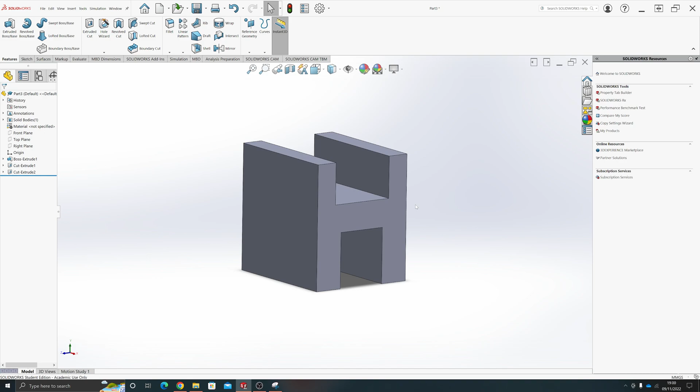Okay, so in the previous video you should have got to this stage with your shape. If you haven't, go back to the previous video and get to the stage where you've got these two cutouts. Now we're going to rotate our object and draw on this surface here. Click on this one and do sketch, spacebar, Normal To.

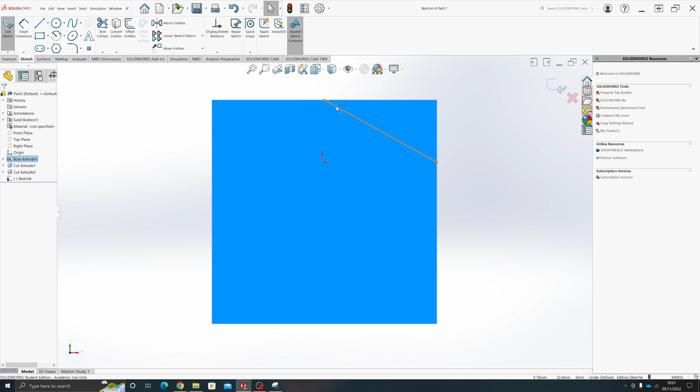What we're going to do is cut out this corner basically, so we're going to cut this corner off. I'm going to use my line tool and just click on this line. Don't worry too much about where they point to at the moment, as long as they move along and you haven't locked it to the middle line. If you lock it to the middle line, we won't be able to use this. So just click near the edge of the corners, like so.

What we're then going to do is smart dimension this point here, so this point to this corner here, and we're going to say that we want that to be 30 millimeters away. And from this point to this point here we want it to be 40 millimeters away.

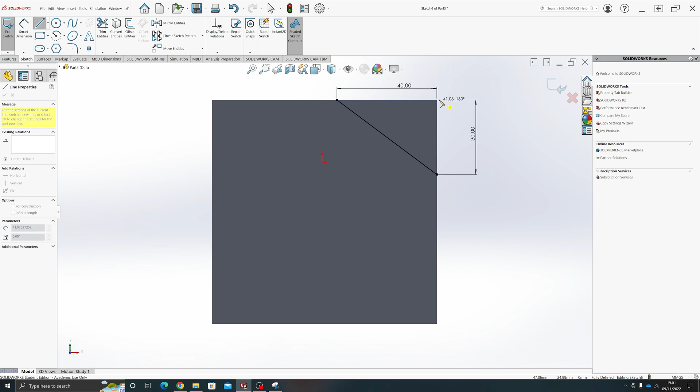Because we want to cut out this section here, we can actually fill in this section. So we're going to draw a line across here and here, basically drawing the profile of what we're going to cut out. I'm going to go to my features, extrude cut, and cut all the way through. So then I end up with this cut away here.

What I'm going to do after this now is I'm going to add a fillet. A fillet is when you round the edges. You get two different tools up here, a fillet and a chamfer, and just bearing in mind this is in the features tab, so if you're in the sketch tab, it won't appear. So do features and then you've got fillet, and then you've got the drop down chamfer. So fillet for us is going to be rounded.

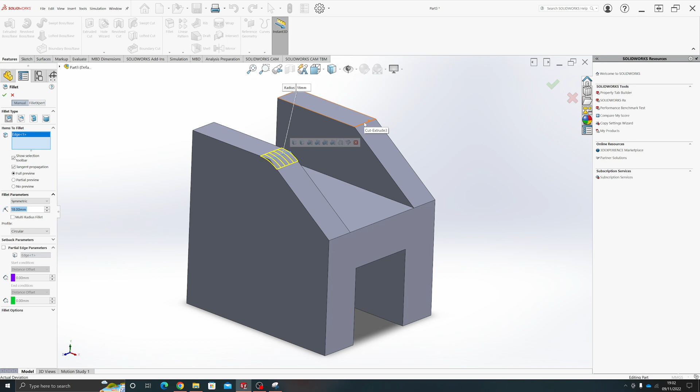We're going to set this to 18 millimeters. Then I'm going to select the two lines that I want it to round, so these two lines here. I'm going to do both of them at the same time - you can do them separately, but that just means if you wanted to change any measurements, you've got to change both individually, so it's easier to do them in one go. Push the green tick, and then we've got our fillet on there, so it's been rounded slightly.

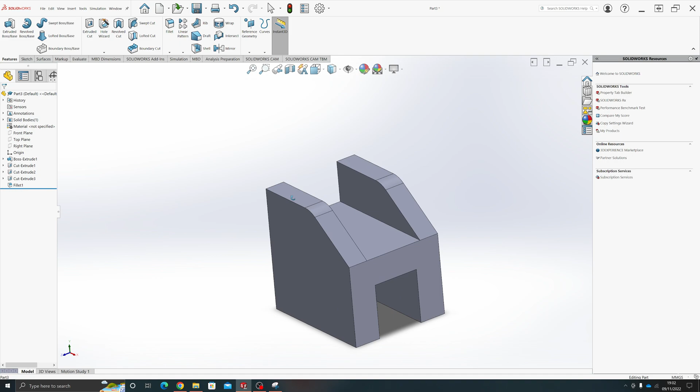What we're now going to do is start adding some of the holes for this object. So we're going to sketch on this face here. Click and sketch, spacebar and Normal To.

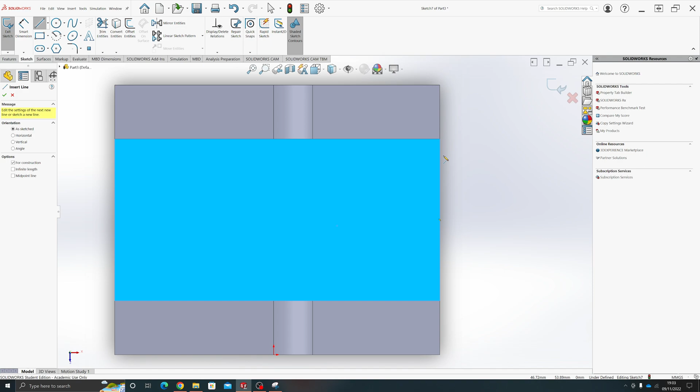And what we're going to do is start using something called a construction line. Construction lines are really useful if you just want to mock out where something's going to go or figure out where something's going to be positioned. So you click on line and then click for construction. If I move my mouse along here, eventually it moves to an orange point, which is the center point of this object or line. So if I click on there and draw away from my center point, click and push escape, you can see this is just a dashed line with a dash and a dot. That signifies it is a construction line and won't be considered or impact when you are extruding, so it ignores it when you're extruding.

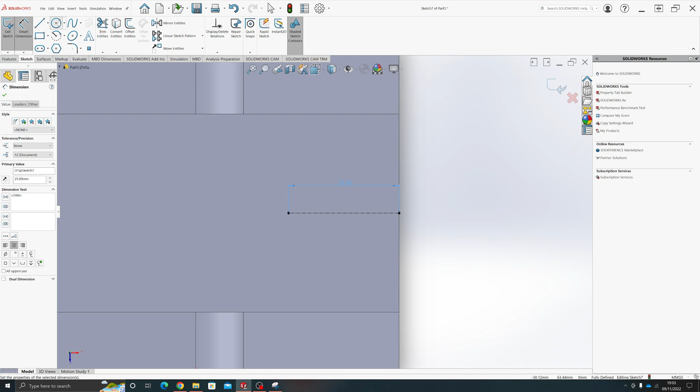So what I want to do is smart dimension that line and do it to 25 millimeters. Click the green tick. What we're then going to do is use that as a reference for our circle.

So we're going to draw a circle. Again, I've selected the circle tool from sketch, the center point, and then dragged it out. I'm then going to smart dimension this, so I set the diameter to 25 millimeters - that's the diameter all the way across, so it's a 25 millimeter diameter for us.

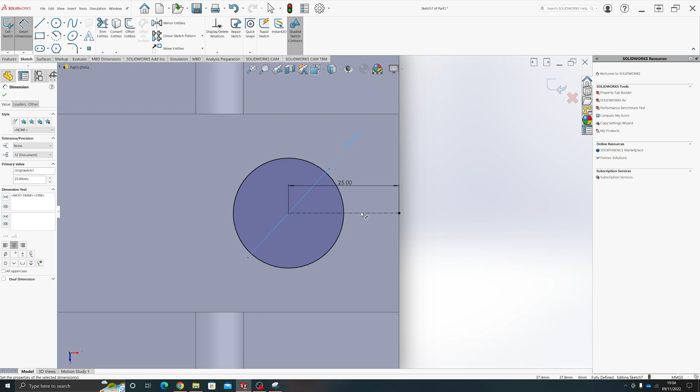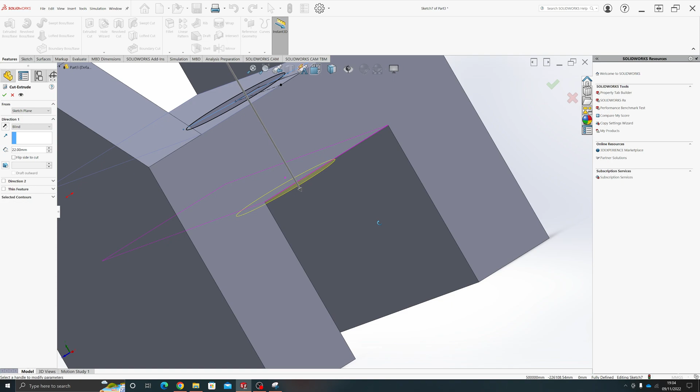With that, I'm then going to go to my features, extrude cut. I don't need to cut quite all the way down like that, so I just pull it back up slightly. You could drag it all the way down and it won't impact your model too much, but it is bad practice to extrude too far away from your model because you might accidentally cut through something else somewhere. So it's best to keep it so it's just about cutting all the way through - I normally do it like 1 more millimeter than I need, so it definitely cuts all the way through. Green tick, and then we've got our first hole cut out there.

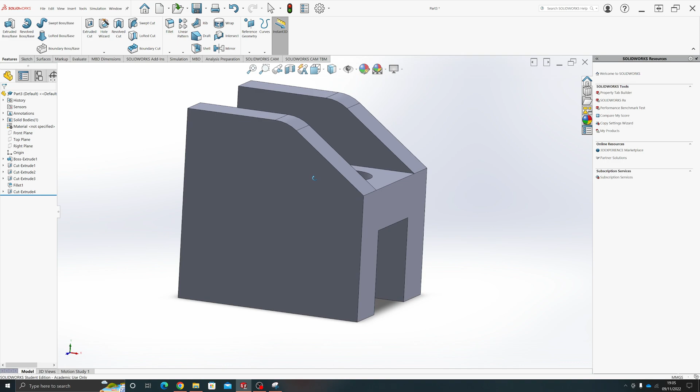Next, what we're going to do is cut out the circles on the side here. So I'm going to click on here, on this face, click and sketch, spacebar, normal to.

Next, I'm going to use my construction lines again, adding a construction line coming from this side across, and another construction line coming from this point. I'm going to let them intersect here, because then I can determine where these lines are going to be.

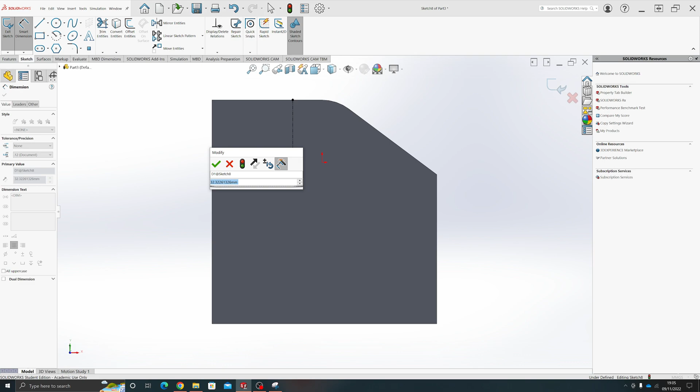So what I'm going to do is Smart Dimension, and set how far across I want this line to be. I want it to go across 35 millimeters, so that's 35 millimeters across. And then I want this to go down 20 millimeters. It's moved it up slightly, but it's helpful because it's got it all in the right positions for me.

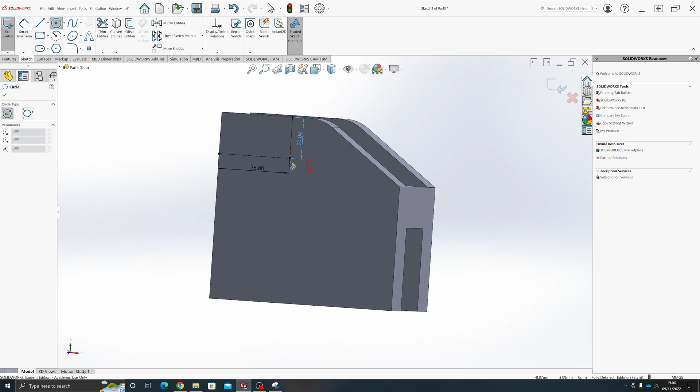I'm then going to add a circle in the middle of this, so this point here, green tick. And then I'm going to do my Smart Dimension, and for this one I'm going to set it to 10 millimeters - a 10 millimeter diameter. Feature, extrude cut, and just cut all the way through, like so.

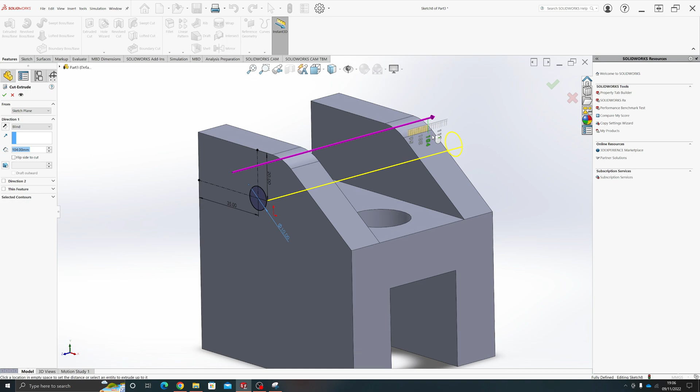You can, if you want, set it so it will go to a certain place or area. You can do through all, which will automatically set it to go through everything in line with it. You can do up to next, and there's lots of other options. You can do blind, and you can actually select a surface as well, so you can tell it to go up to this face here, for example.

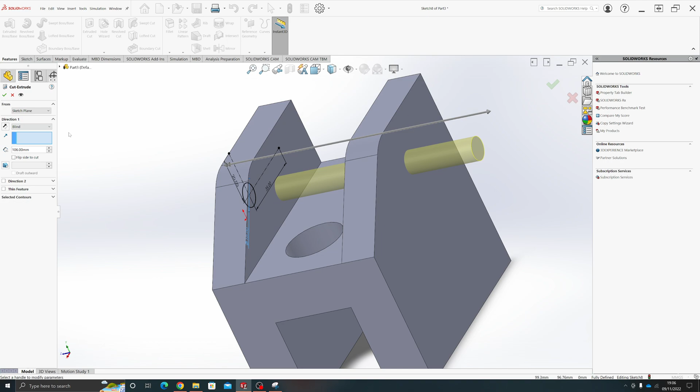But most of the time it's actually easier just to do blind and then choose what you want it to be. Green tick, and then we've got it cut all the way through, and we've got it in the right position.

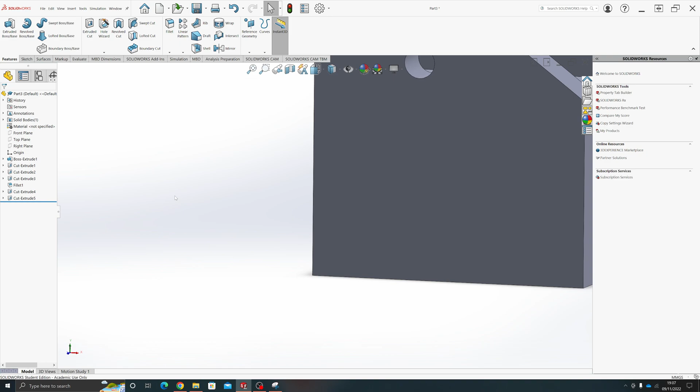Now what we're going to do is the point that goes on the side here. If you want to draw something that comes off the edge of an object, we could sketch here, extrude it out, and then cut it to the right size. Or what we can do is go to the back of the object and sketch on this face here.

So I'll do my normal to, and we're going to use this face here, remembering that the faces and planes are almost infinite, so I can actually draw off the right side to add material. I'm going to add my point along here, connect it to this line, have it go across, and connect it back to the bottom, so it should form a triangle shape.

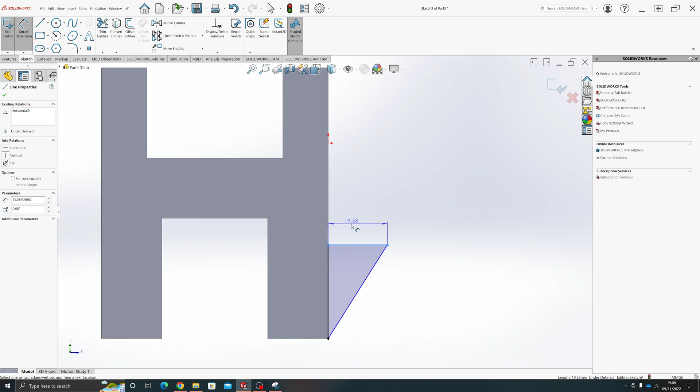Then we're going to Smart Dimension these to make sure we get them to the right sizes. We're going to set this to come out 20 millimeters, so it comes out 20 millimeters at the top here. We also want the height of this set, so we're going to set this to 40 millimeters height. So we've got the height there.

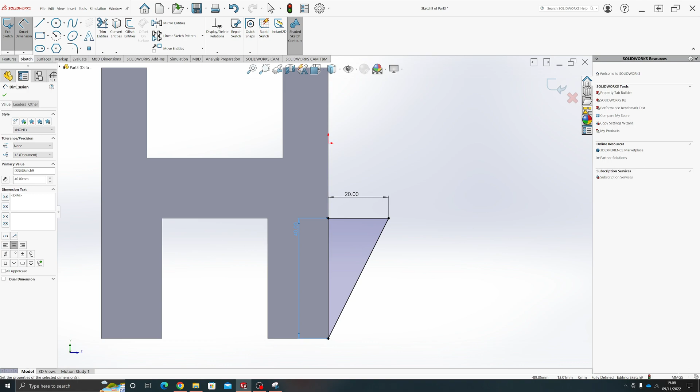Then what we're going to do is extrude this shape. Features, extrude, and if it's gone backwards, just pull it through itself. The other option is you can click this button here, which will flip it, so you can see it flips either side. We're going to set this to 15 millimeters. Okay, and then green tick, like so.

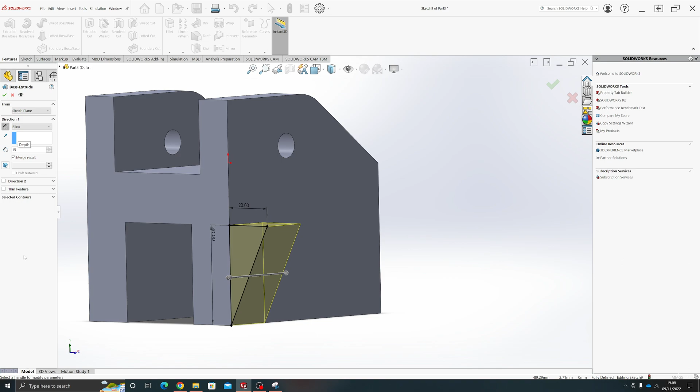And then what we're going to do is sketch on this face here. So sketch, spacebar, normal to. And then we're going to add our circle on here. Now we can do our construction lines again, which is quite a good thing to do - good practice to get used to doing your construction lines.

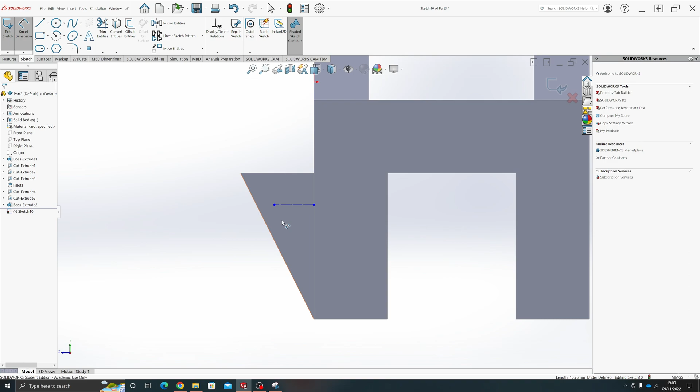So what I want to do is have a construction line that's going to go across this way. Oh, I've done that as an actual line. If you've done what I've just done there, and you've got a line that you meant to be a construction line, you can click it, and on the left select construction line, and just change it to a construction line afterwards.

Smart Dimension, and I want to do this line from this point here though, so I want to get rid of that measurement there. I want to click on this dot here, and click on this dot here, so I'm basically telling it how far I want it to be from that position. I want to set this to 32 millimeters.

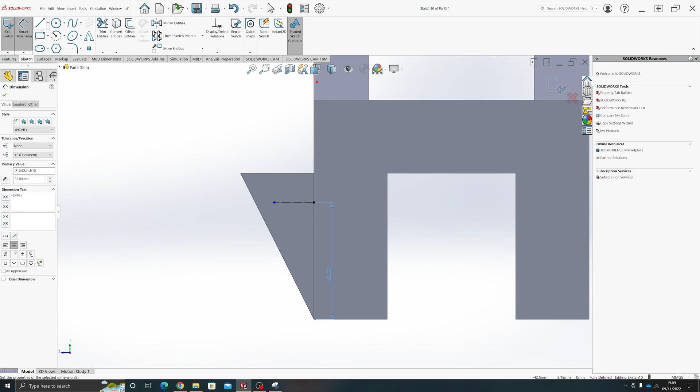I also want my construction line from this point here up to here, and I want to Smart Dimension this one to this corner here, and choose 8, so I know exactly where this is positioned - 8 millimeters away from that edge, and 32 millimeters up from the base.

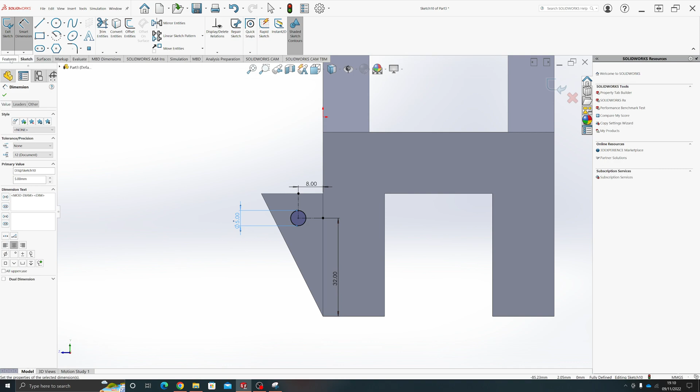I'm then going to add my circle in here, like so, and then we're going to Smart Dimension this one. I'm going to set this one to 5 millimeters, so there's a 5mm diameter on there. Do my feature, extrude cut, and make sure it comes through, and green tick.

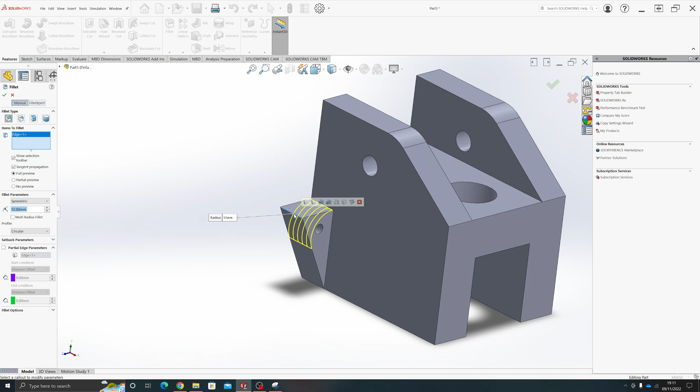And then what we want to do for the final bit is add a fillet, and this fillet's actually a bit smaller - this is only a 12mm one, click that there. Or did I do it smaller than that? I think I did it smaller than that. I did, yeah, so do that one for about a 5mm one. That's why - so yeah, 5mm fillet on there, and then you should have completed that object.

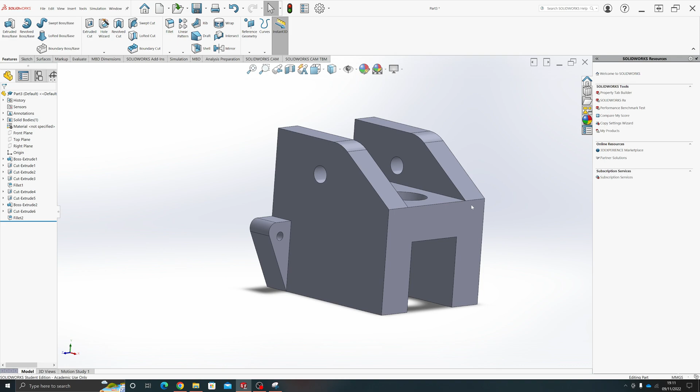So if you've managed to complete this one, you can have a look at some of the other more challenging objects. There's some that are in easy, medium and hard, so try those, or you can try some more of the different shaped ones that I've got as well.